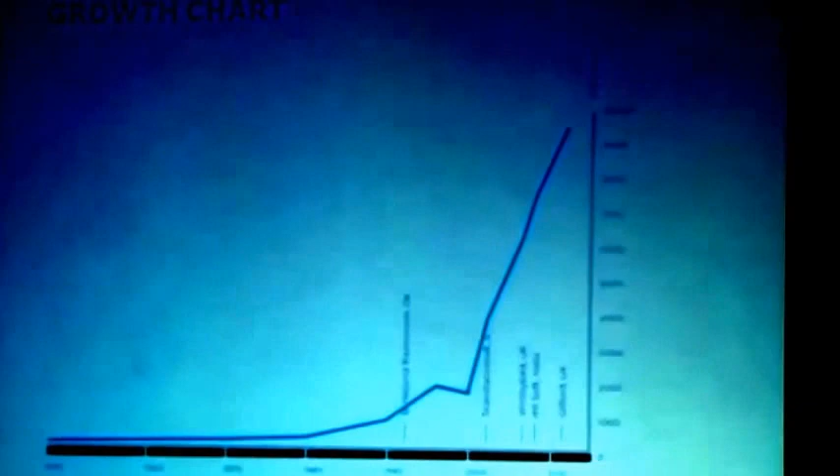Founded in 1945, we started with 2 people, and both were Danish engineers, similar to L&T. What is typical of Nordic countries is their company was formed on the basis of very high ethical standards, contributing to society and employees. This is how we have grown in the last 12 years. In 2000 we were about 2,000 people, and in 2014 we are about 10,000 people. We have grown through organic growth and also by acquiring some companies. We are part of the UN Global Compact, and it has 10 principles which come with it.

This shows some of our offices. As you can see, we are very strong in Europe. And then we have some presence in India and the Middle East, and we also have a small presence in the US now. Ramboll Group works across all the markets. We do all engineering services. We are also into management consultancy. We also do sustainable design.

And in India, I'll go to the next one. Yeah, this is in India. In India presently we are operating in these 7 sectors: buildings, transport, energy, environment, oil and gas, telecom and management consulting. We are the market leaders in telecom towers, and I think we have built about 30,000 towers in India alone.

This is about the Indian office. We have about 110 staff, and we are providing services in structures, MEP, and project management consultancy. We can also provide services in fire and facade through our colleagues in the Middle East, UK, and also in Denmark. This is the topic which I have taken, and I think I got about 20 minutes to talk about it, so I'll try to rush through because we are running against time.

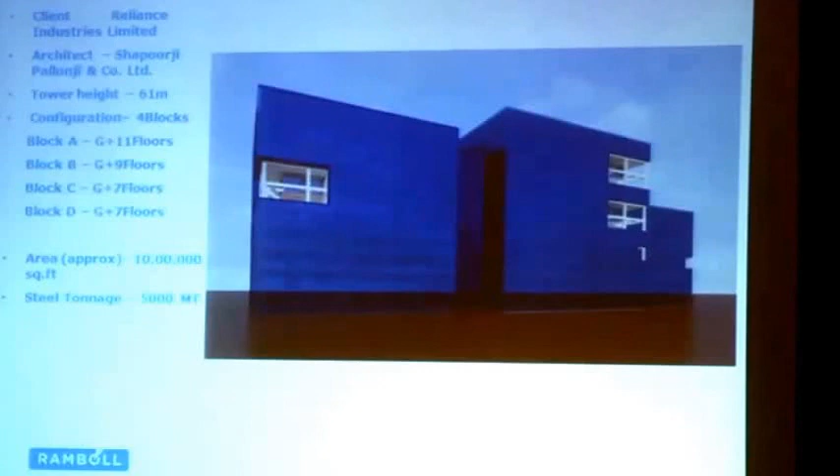This is a building in the RCP TC22 Navi Mumbai complex. Reliance is of course the client, and we worked for the contractor JSSL. JSSL were bidding for this job as design and build, and they came to us to pitch for it. The challenge was to be competitive compared to an RCC building. We knew it was difficult, but we took it as a challenge. It consists of 4 blocks, A, B, C, D, varying from 11 floors to 7 floors, and the total development was about 1 million square feet in the end, with total steel tonnage of about 5,000 tons.

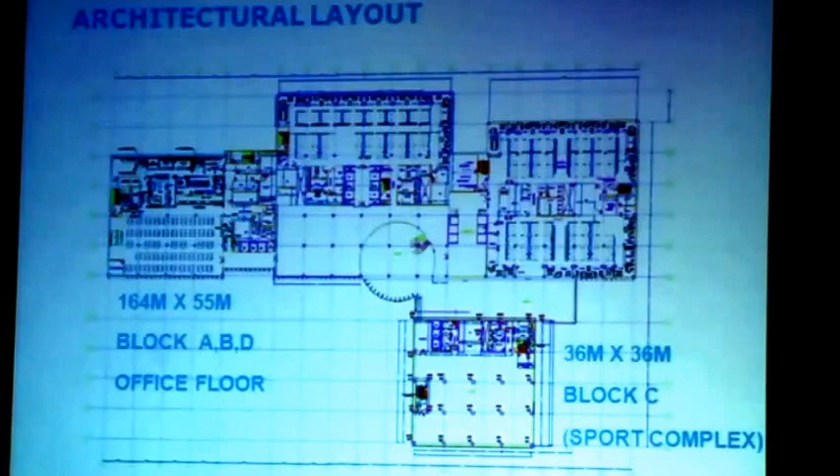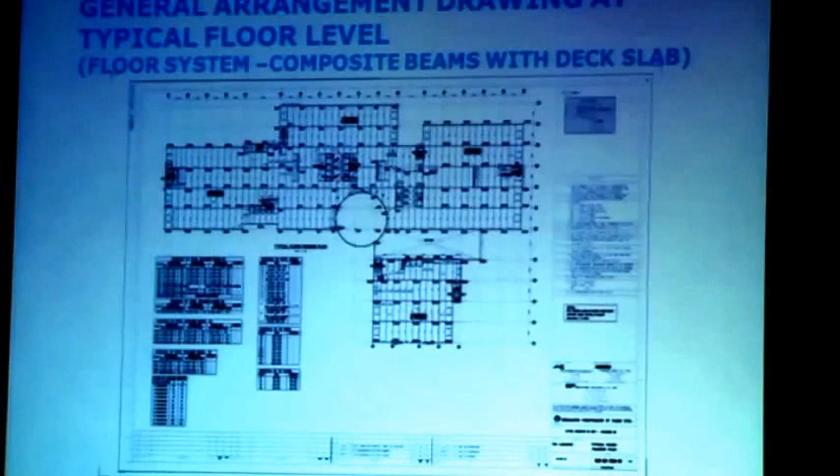In a building, the major cost is through the floor system. Columns and foundations are there, but if you work out a proper floor system, then the cost of the building can be controlled. So we worked a lot on options for the floor systems, and finally decided on a one-way slab system, where the decking can span about 2.6 to 3 meters, because with higher spans the decking cost was increasing.

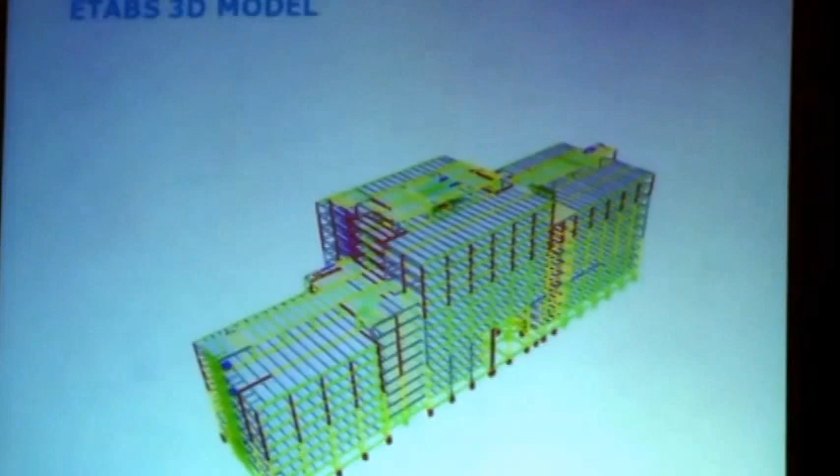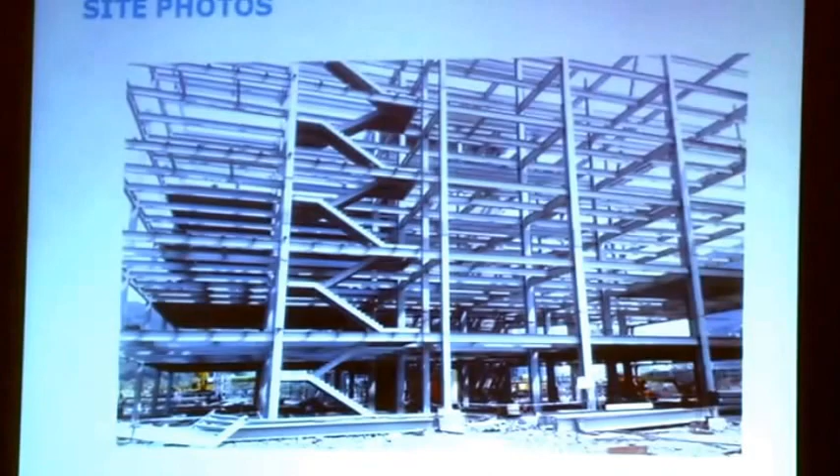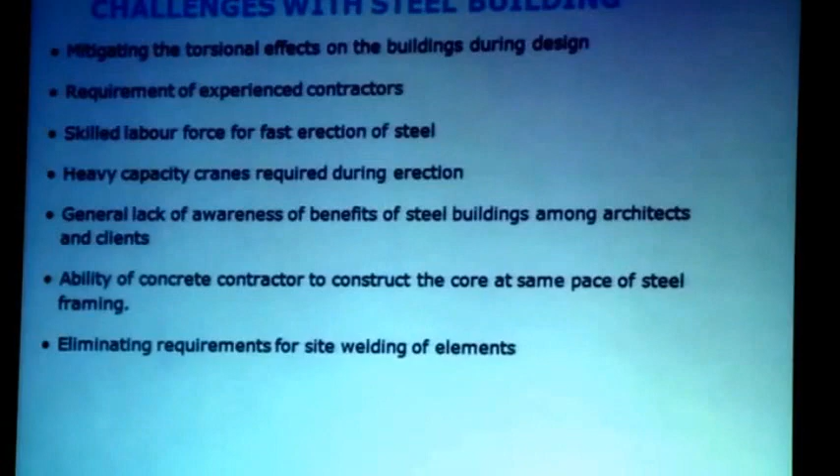Coming to the costing, first of all, we faced challenges. When you are doing a steel building, the problem we always face is deflection. Deflections tend to be a problem in steel buildings, and also torsion, which sometimes controls the design of the building. So while working on the options, we worked out different layouts with JSSL, and ultimately we saw that going with a simpler rectangular block would help us achieve this economy.

The second challenge, which is general with steel buildings, is the requirement of an experienced contractor, which has been touched upon by my colleagues, so I'll not talk about that. Also the ability of the concrete contractor to construct the core is very important when constructing a steel building, because the speed of the steel building depends a lot on how fast you can build up the core. So in the design of this building, the criteria was that the civil contractor would complete the core up to the 5th or 6th floor, and then the steel work could start.

Optimization of steel, of the design. When we started working on this design, initial consumption was coming about 60 kg per square meter, which was carried out without the lateral load analysis. It was based on the gravity load and on the thumb rule basis, as mentioned earlier by Girish.

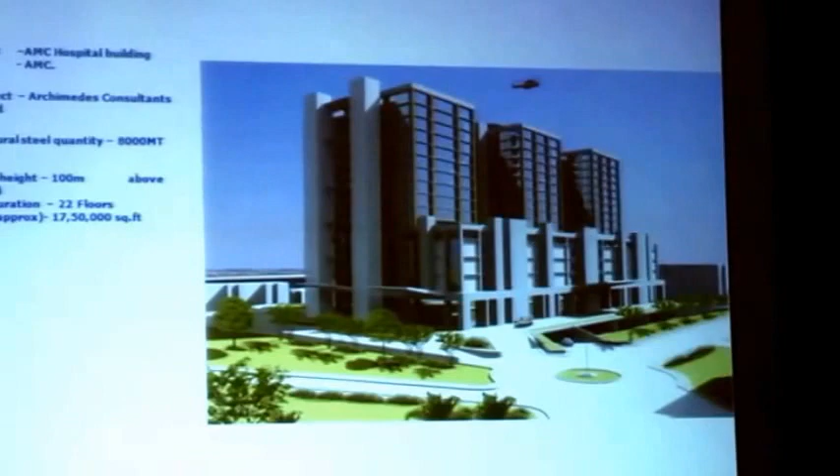All the steel members were designed for vertical loads, and the lateral load is taken by the cores. In this building, we also had the fire ramps made of concrete, and also 4 staircases made in concrete, which helped us achieve stability for the building.

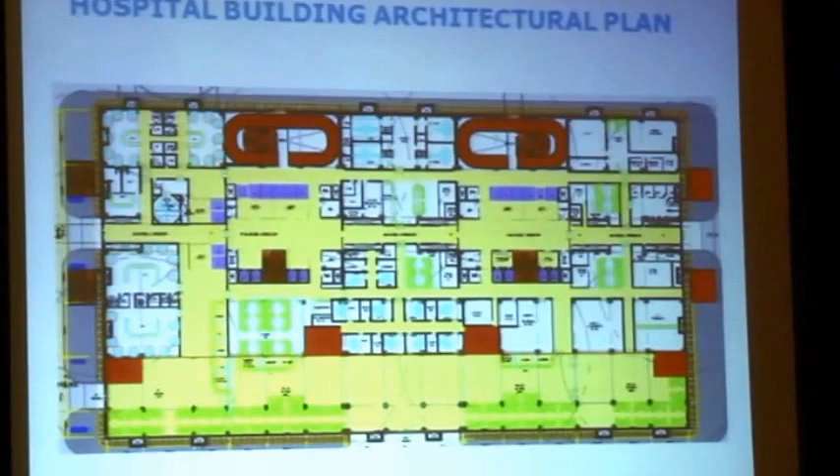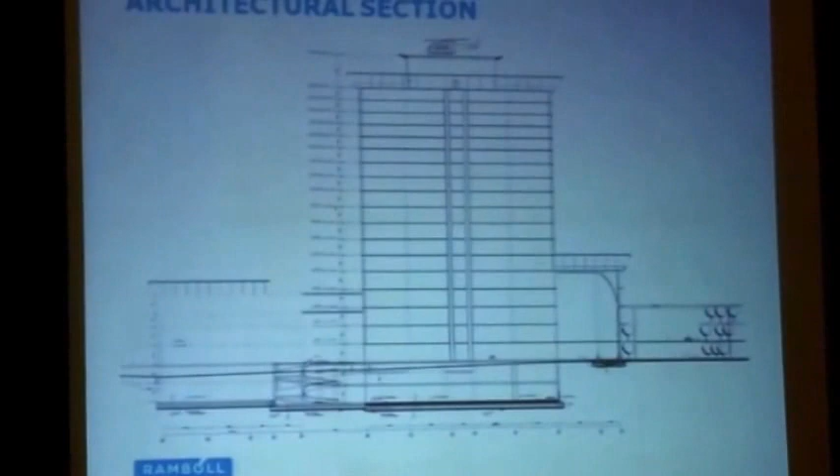It's a hospital building, again in Ahmedabad, which is a high seismic zone, so earthquake forces are very high. This shows a typical section of the building. It has 2 basements and about 22 floors, with a helipad at the top.

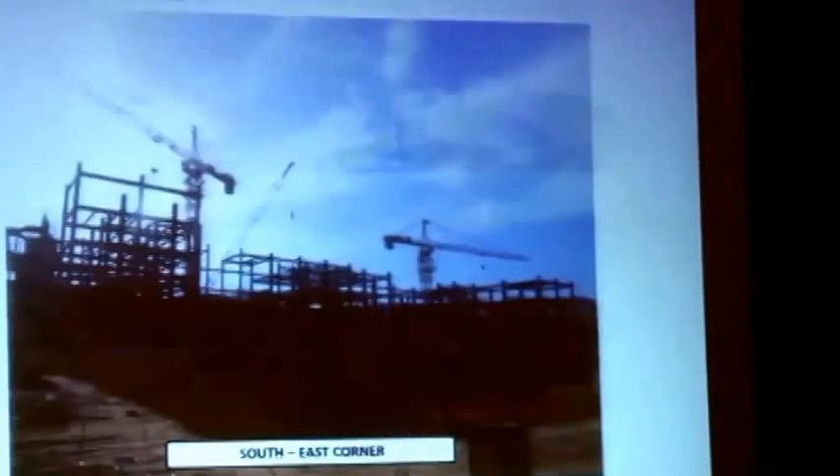Again, we prepared this model in 3D on ETABS, and then the same was used to transfer it to Tekla by the steel contractors, and steel fabrication was developed based on those Tekla drawings. This shows construction which is going on at the site.

This project is delayed a little bit because the problem we faced was that the central core was not ready, due to delay from the civil contractor's side. The fabrication material was ready, but the steel contractor was not able to erect the material because the core was not available.

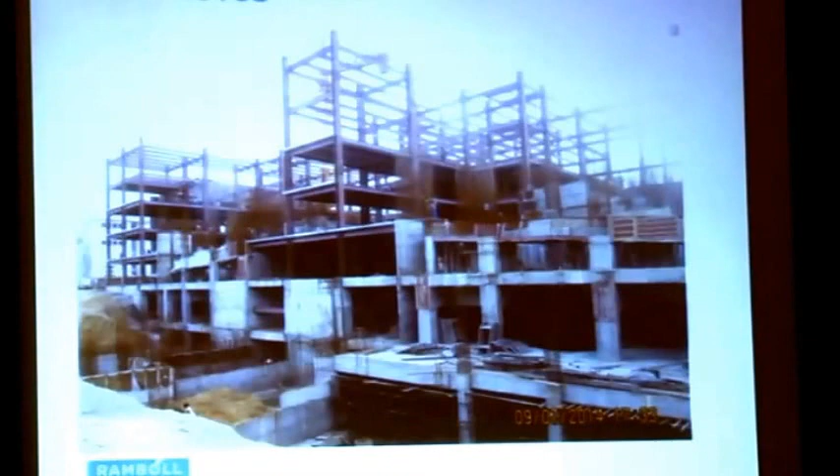So this is one typical example of what we should not do in a steel building. We need to be very careful while designing, and we need to make sure that the core is in place when the steel contractor is on the board.

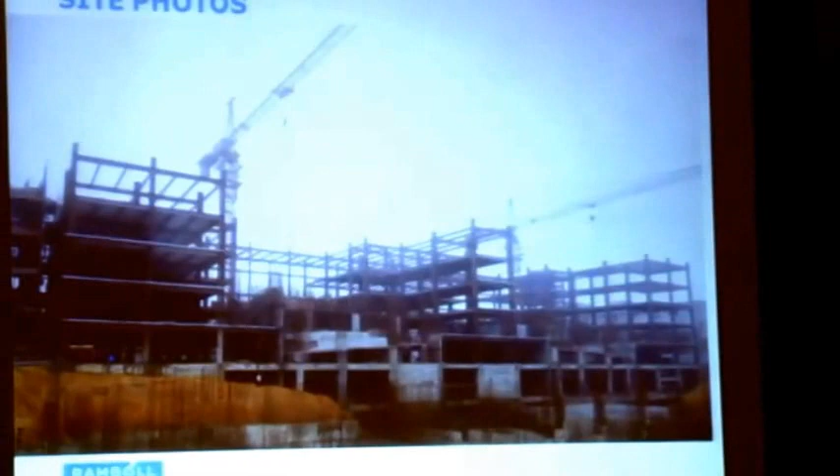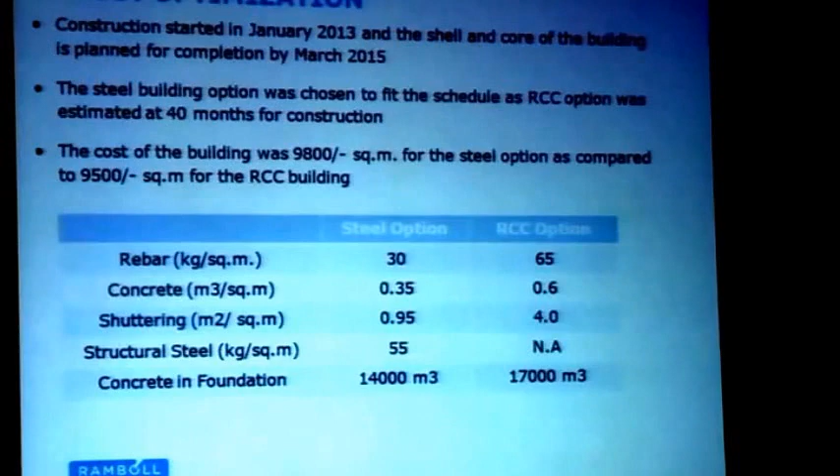This is some of the numbers we are talking about: 30 kg per square meter in rebar and 65 in this. You can see the concrete difference was not much in the foundation because the SBC was not very high, so we were not able to take advantage of reduced loads because of the steel building. The structural steel consumption was about 55 kg per square meter.

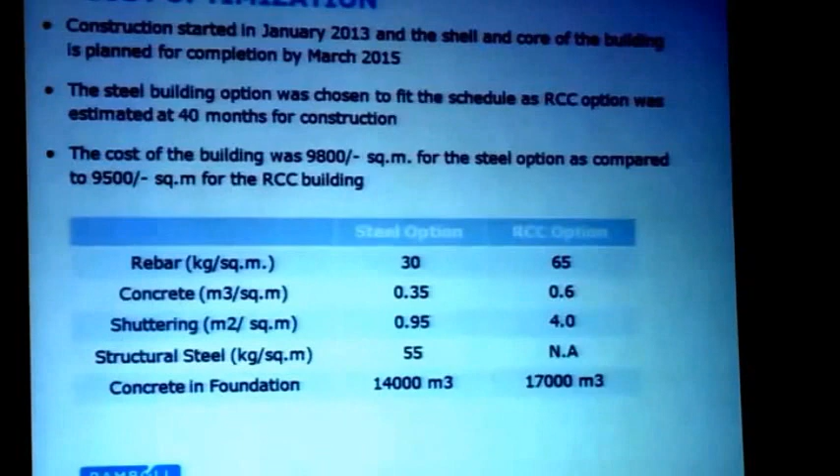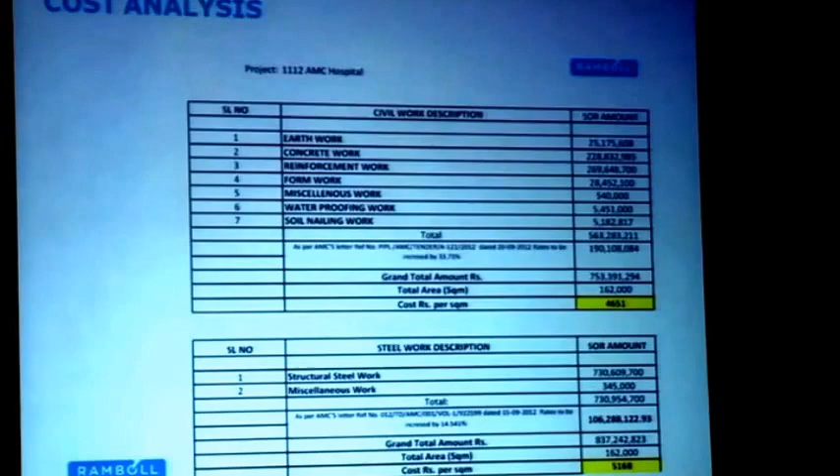This shows a more detailed breakup, with numbers quoted by the contractors. The total cost is about 1,000 rupees per square foot, or 10,000 rupees per square meter, out of which 5,200 is steel and about 4,800 is concrete.

Coming to a final point: if you want to do cost optimization in a steel building, there's really no magic wand or something like that. We really need to work on the scheme, sit with the architect, sit with the client, and work out something that is optimum. I guess we need to put in more man hours, more engineering hours, to come out with a better design.